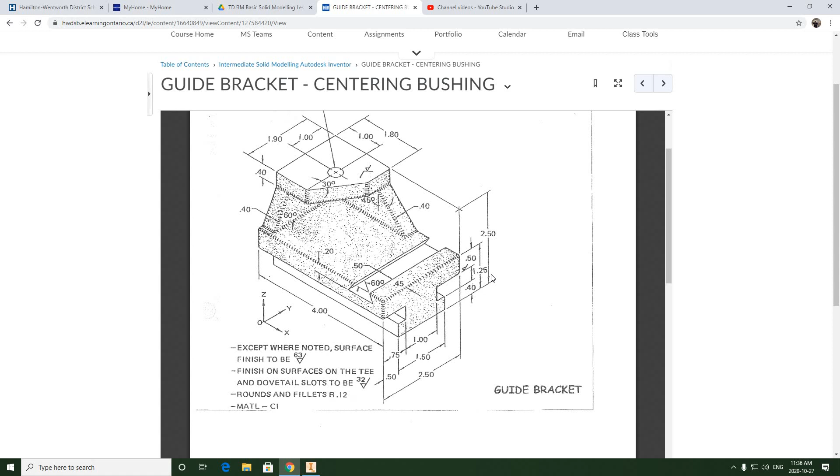Now we're going to be using a C-size sheet to complete this exercise. I'm going to try to keep some of the dimensioning where it is, but some of it has to be changed because it doesn't follow the rules of dimensioning. For example, dimensions shouldn't be sitting on top of the part in orthographic projection. This is an isometric view of this part, so we are going to be improving on it as you've seen me do in the past. I'm not going to be crossing over extension lines.

And I'm going to be setting an appropriate distance from the drawing view when I run these dimensions as well. So, as always, I like to show what this looks like first before I get started, discuss my plan of action, and then I'm going to be switching this to my iPad while I complete the work so I don't have to constantly go between two screens.

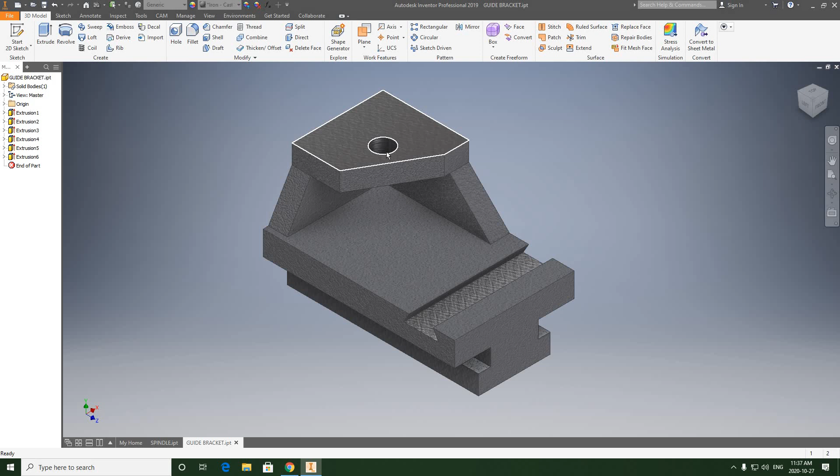So we're going to be going into the guide bracket model, and I also want to remind you not to complete fillets for this. I don't care about adding the fillets to this model, and it actually makes the dimensioning a little harder because there are so many fillets on this that a lot of lines actually disappear when we create the drawing file. So remember, if you've run the fillets or some of them, you can just remove them, because I don't have any for mine, as you can see.

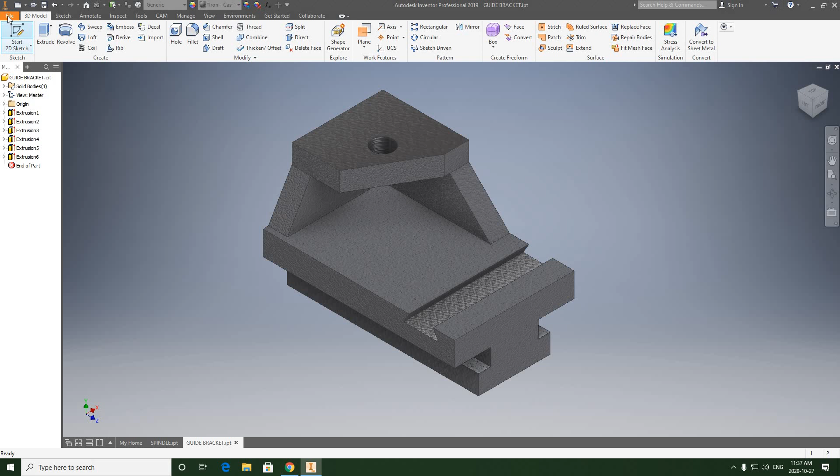So we're going to go File, New, Standard Inch IPT, ANSI Inch IDW as always. And I'm going to change the D size sheet to a C size sheet. We're going to hit OK.

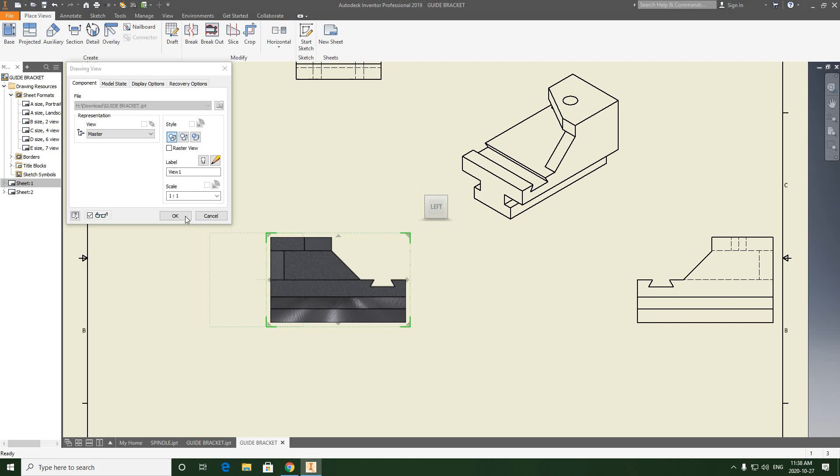And this is going to give us a lot of views that we really don't need and aren't useful. This right side view is useful, but it's considering this to be a front view, and so we're going to be changing this. I'm going to click on this view and switch it to be the left, which is really the front view. This is the view that I'm interested in. And that will force all these other views to get in line with the parent view. The parent view, the bottom left view, the front view, is the one that controls the other views.

As you know, I can move the top view up and down, but not left to right. I can move the right side view left to right, but not up and down. But the front view, I can control them all.

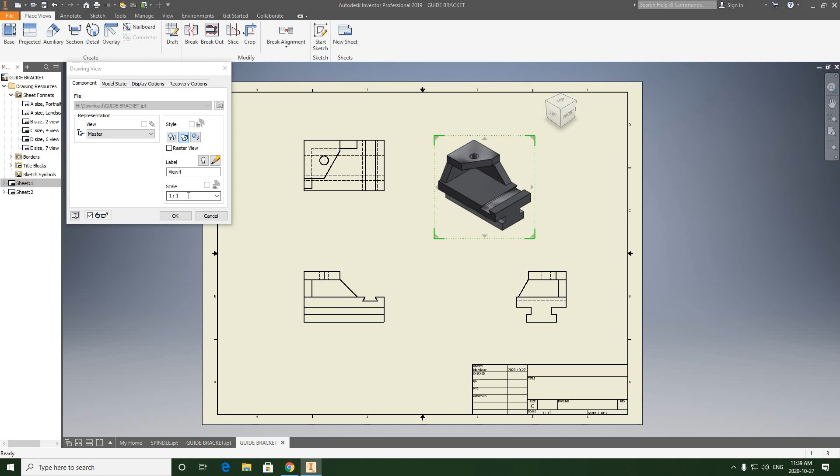And then this view here, we're going to switch this. We're going to double click, switch this corner. This is the better isometric view, shows more information. And we're going to scale this down to 3/4. Hit OK. And we're going to sneak that up into the corner. Well, we're not sneaking it up there, but you catch my drift.

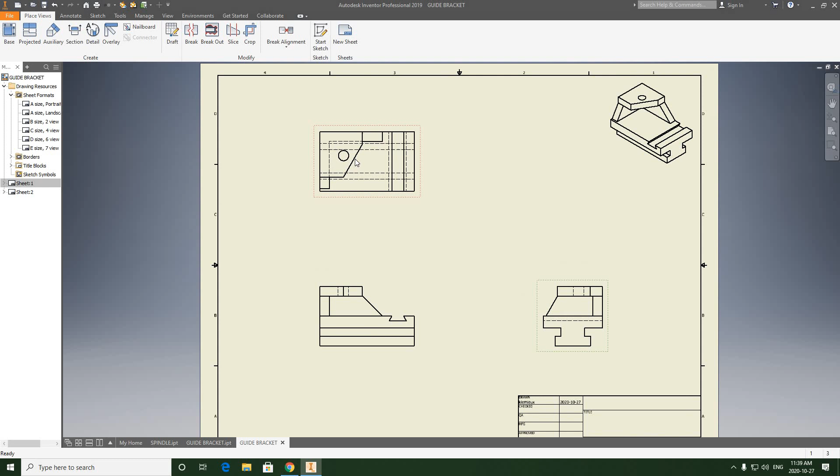All right, so the first thing we need to do, as discussed before, is we're going to be creating centerline annotations. So on a drawing, anything that is circular, a circle, anything that represents symmetry requires a center line. So we're going to switch to annotate, pick center mark, and create a center mark for that circle there.

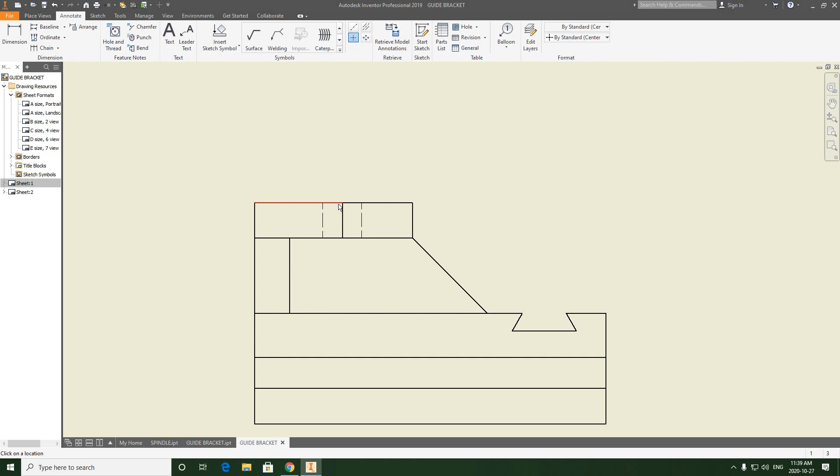Now, here is a bit difficult because this object line is where this object line ends. This is directly in line with the center line. So basically this object line is more dominant and supersedes that center line.

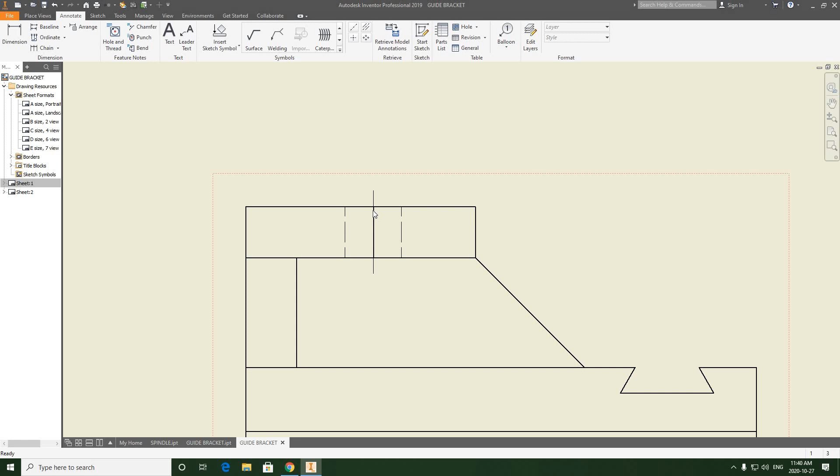But what we can do is still add a bisector center line. We can select this hidden line and this one, and it will add the center line in, because center lines always extend beyond the feature they're attached to. So it makes sense that the center line would stick out above and below the hole. It doesn't really matter that we can't see the center line behind this object line.

And also, we need to show one here. So we'll do another bisector center line. We'll select this vertical hidden line and this vertical hidden line, and we'll create it.

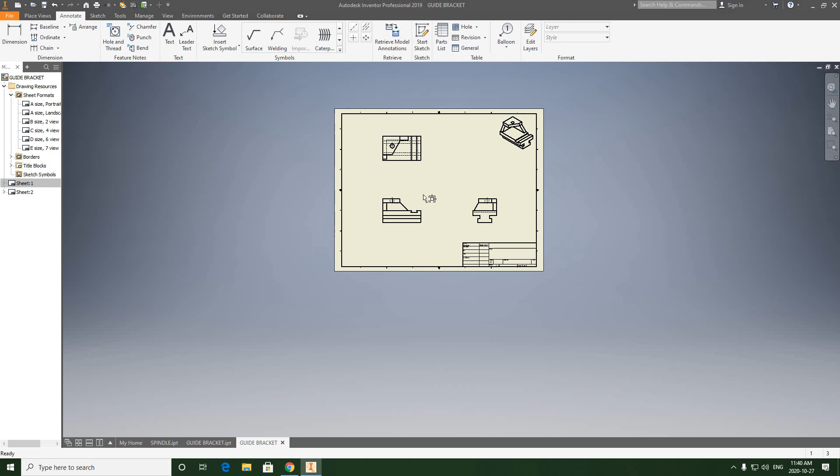So that's everything we need to do for annotations. At this point, we should be able to begin dimensioning this part.

Some of the dimensions I like. The dimensions on the isometric view that show the position of the hole in this top extrusion look good to me, so I'm going to run those dimensions first.

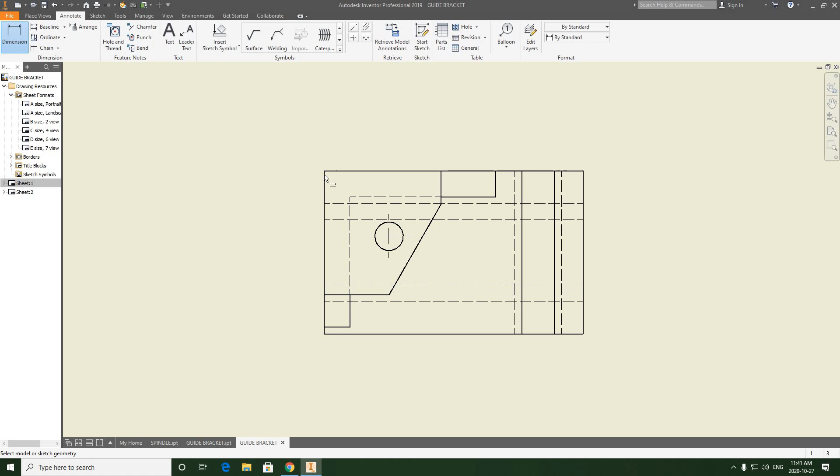It makes the most sense to run those dimensions on the top view where we can actually see the circle in clear view. Remember, we're not crowding the part, we're leaving ourselves some room here, so we're not going to have it super close.

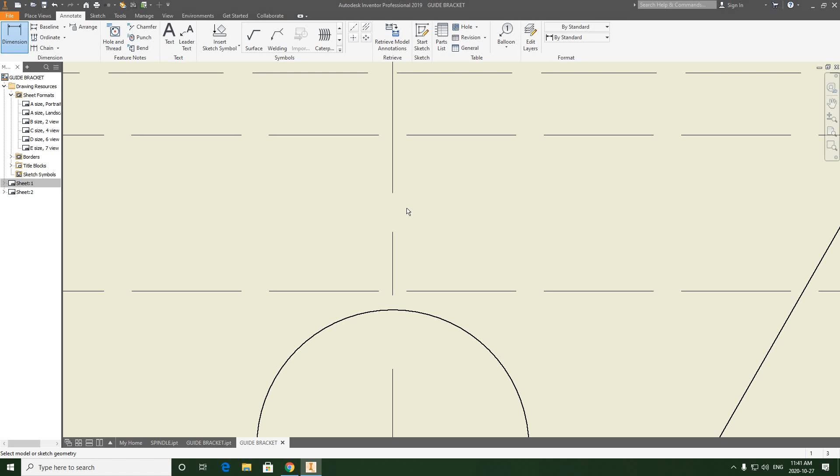I'm using Inventor's hint system where the dimension turns dotted to give me a hint on where I should drop the dimension. Also a reminder that dimension extension lines leave an automatic gap here. When you add the dimension, you click this line and the edge of the center line, it will create the gap for you.

Extension lines should not be running through the holes. This is something I haven't really seen the class do, but just a few people have done things like that, so I just want to clear that up.

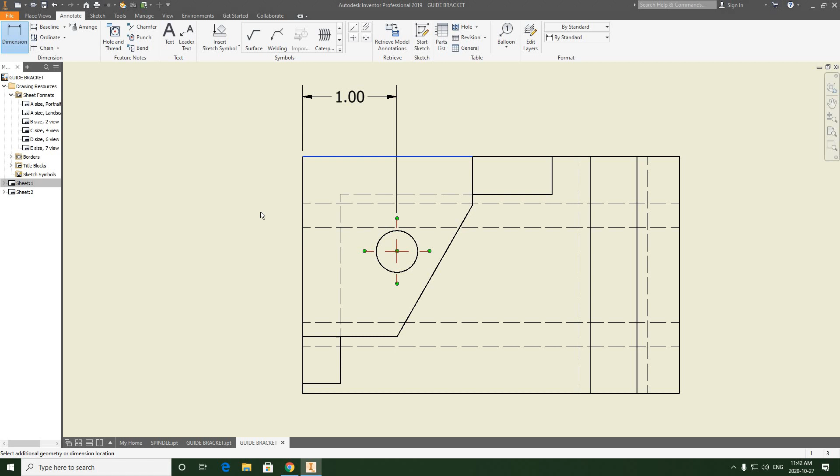So moving on from here to this horizontal line to the center line, we're leaving these 1-inch dimensions pretty even. We want to keep our spacing consistent. This is very important.

These holes, this hole here, we can also dimension this like this.

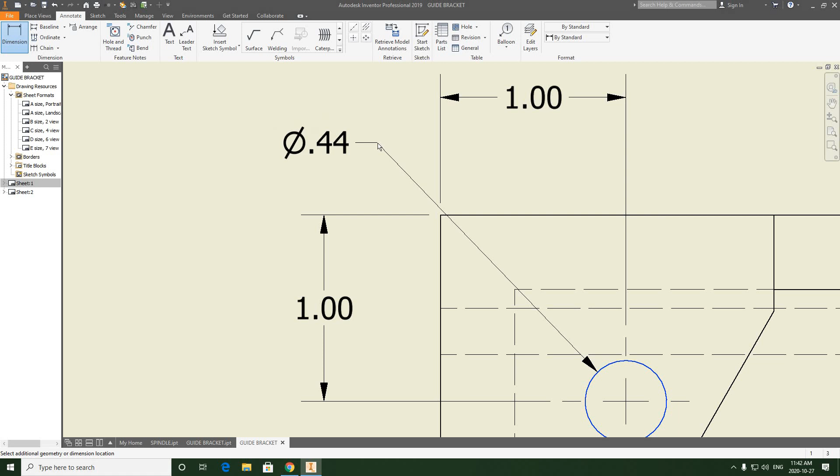We could run the dimension here, sticking into this corner, or we could even run it on this side. It doesn't really matter, as long as we're not crowding it.

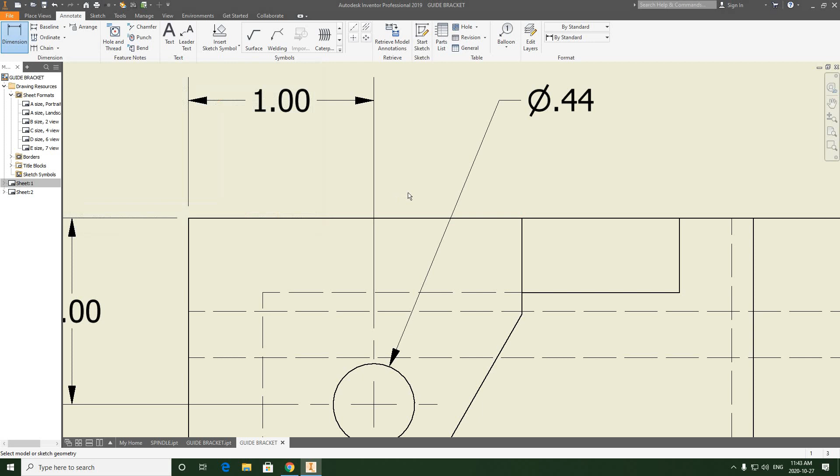So if I put it on this side, I can kind of keep it in line with that dimension arrow, and I don't have to worry about crowding anything and not crossing over extension lines. So I'll leave that one there for now—the 0.44 hole.

Just as a reminder, when we're running these dimensions, we're trying to select the view that is best suited to show the dimensions with clarity. So obviously the top view is the only view where we can show these dimensions 1 inch and 1 inch.

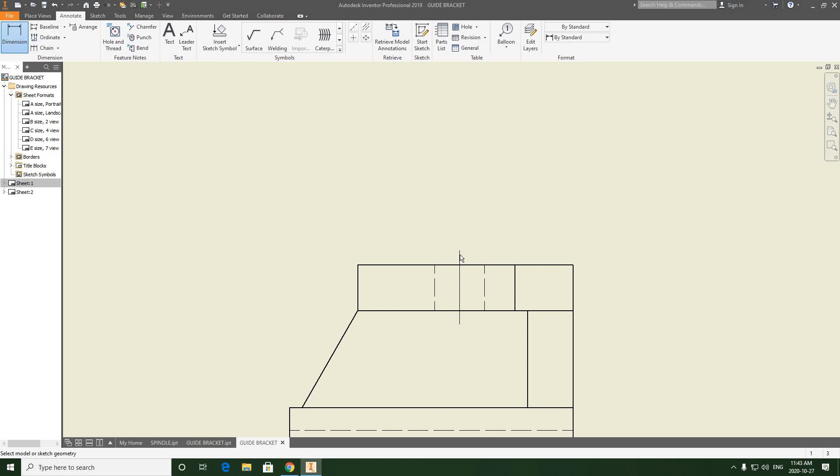That's because we only can dimension to object lines. We can't dimension to hidden detail lines or center lines that are associated with hidden detail lines. That would be incorrect—that goes back to the basic dimensioning rules sheet that's in the hub.

So I may not be referring to that sheet as I do this to show it to you, but I'm verbally referencing a lot of the points that are listed there. So moving on,

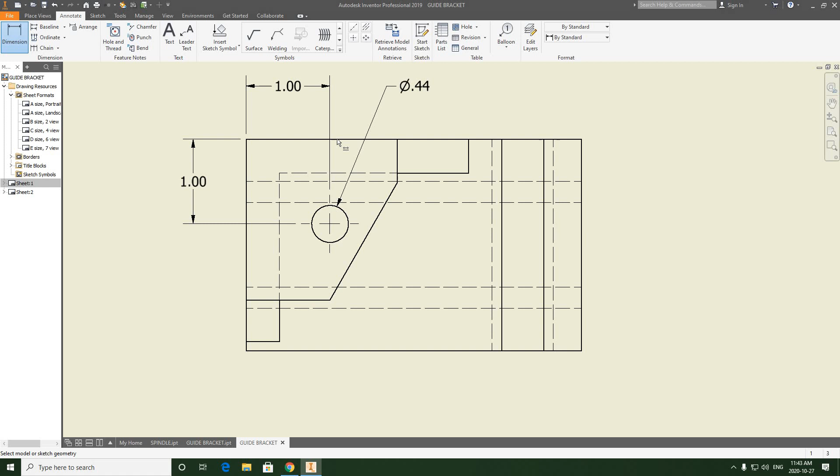I'm going to work on this dovetail slot next. I'm going to clean up what I see on the isometric sheet. I can't have dimensions sitting on top of this.

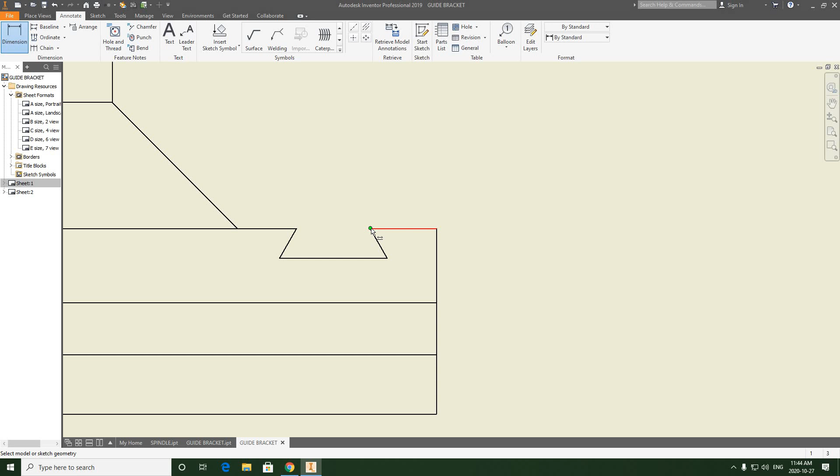What I do need to know is, again, from the edge here to where this dovetail begins. So I can select this line here, pull it up, and this is going to be 0.45.

So what I can do is I can flip this to this side. It doesn't want to fit in the middle, but again, I'm trying to keep the spacing that I pick similar. It doesn't have to be perfect, but it should be pretty close.

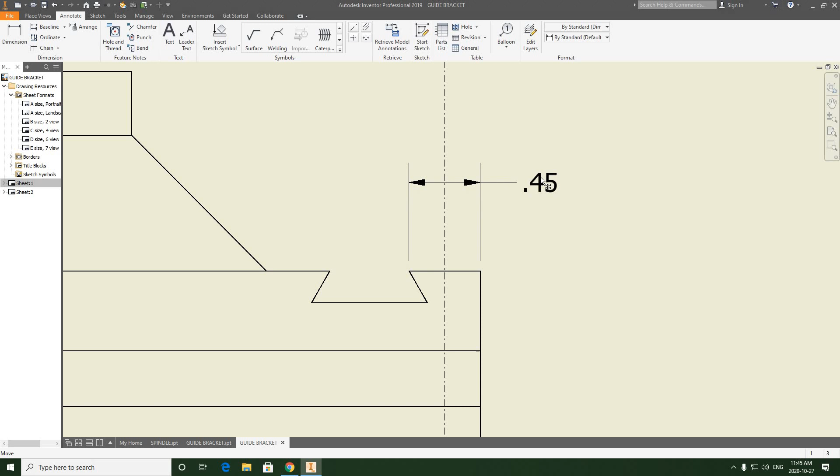This dimension shouldn't be sitting all the way down here if I have these two spaced this far away. For professionalism, we have to make sure that this is being done pretty much the same everywhere. We like to leave ourselves a little room off the first dimension.

We don't need to pull this all the way up here to clear this feature. That would look funny. We only need to come off enough off this detail right here. So next we have the

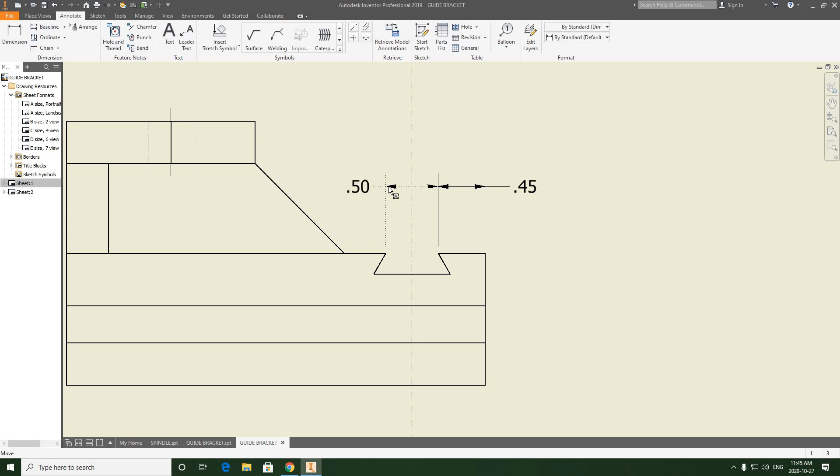0.5—that can chain right up to the 0.45. And again, that doesn't fit inside, so we have to leave it to the outside like this.

We also need to show the depth, which is from here to here, and again we're trying to maintain a proper distance. We can right click, left click OK, and actually drag this dimension to here just so it doesn't crowd up with the 0.45.

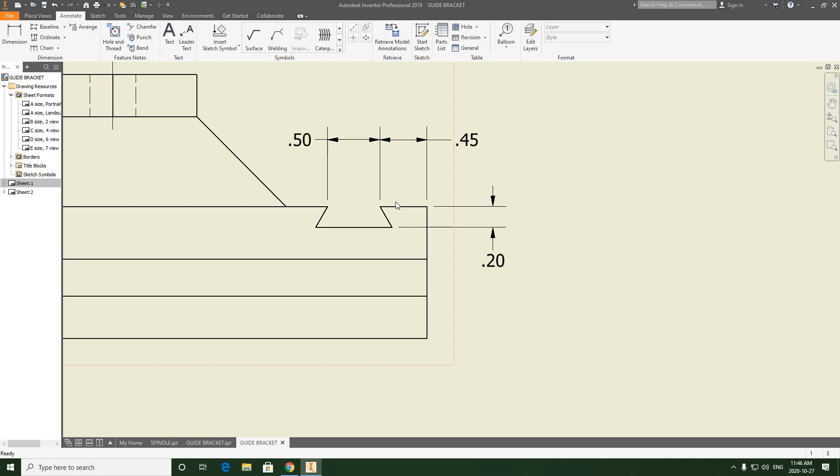So we know the position of the dovetail, its depth here, and what we also need to know is the angle of it.

So we can run a dimension from here to here. Actually, I'm going to undo that because that didn't work out. I'm going to try this.

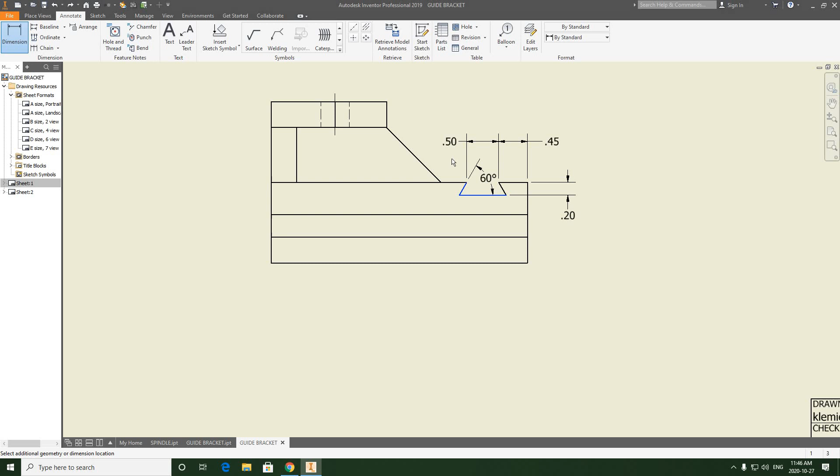And this here, this angular dimension, it's a bit crowded here, right? There's no good opportunity to pull it off the part. So what we could do is what's called a detail view.

So if we go to place views and we select detail, we come in here and we can just pick, select in this area, this dovetail, then left click. We're going to create detail A.

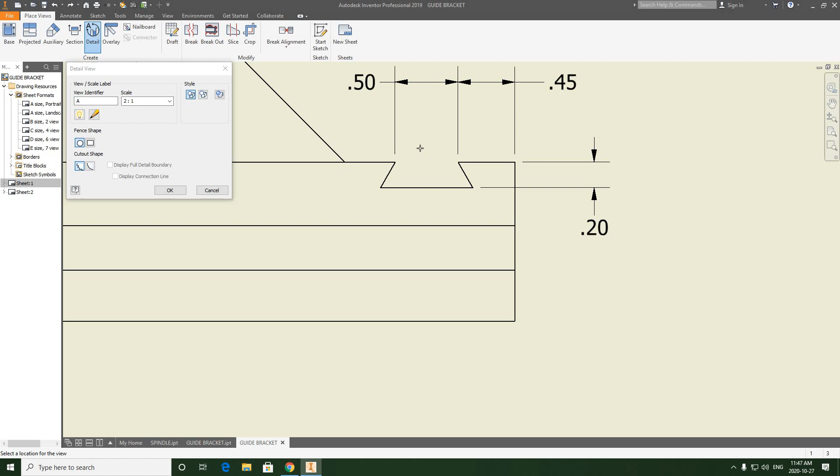And then what we're going to do is pull it off, maybe somewhere down here. And there is our detail A. So this takes this section, copies it, and scales it up twice the scale.

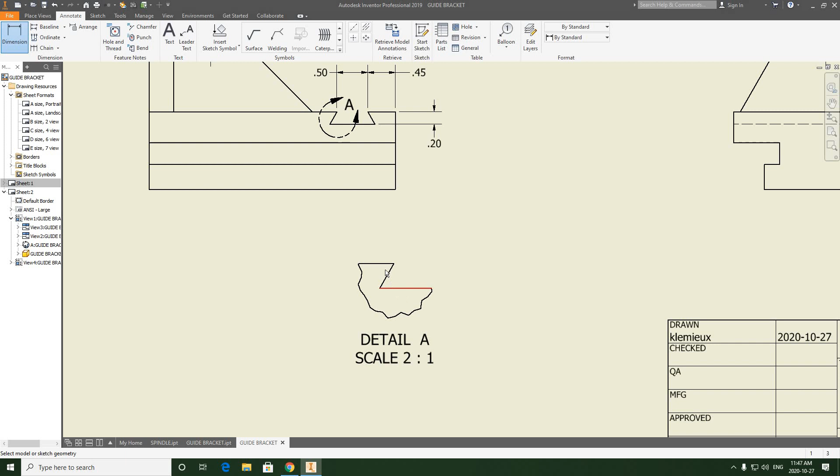And what we can do here is go to Annotate tab, grab Dimension, and then click from here to here, and we can dimension that 60 degrees comfortably. Right? So that's something new that you haven't seen. And that's something that we can take advantage of, definitely, right? There's all these fancy things in Inventor that can make our life easier, and that's one of them.

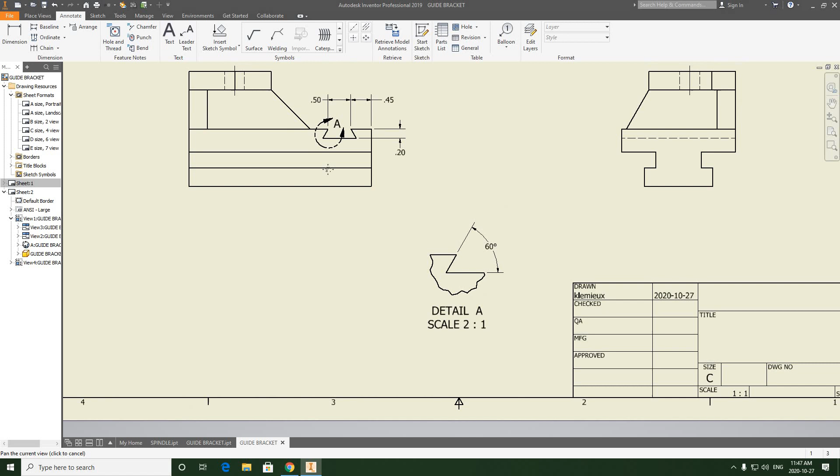So, perfect. Okay, so that takes care of identifying that angle. We are also going to take a look at the thickness of some of these extrusions as well. And I think we'll look at that in a bit.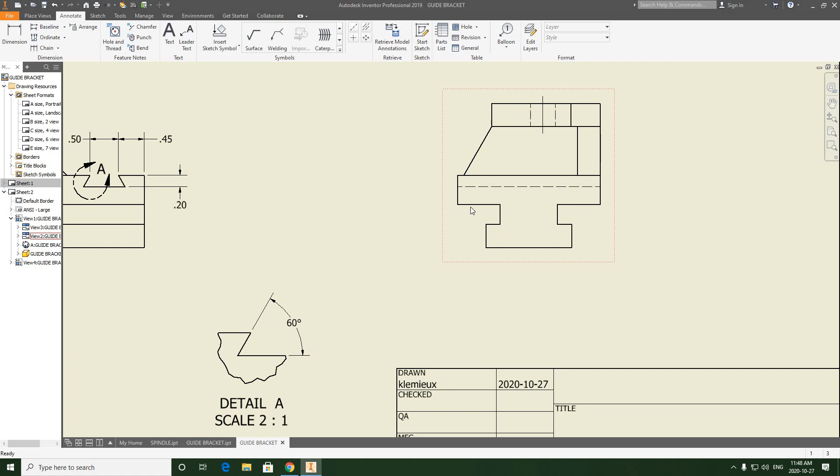I think we'll work on the bottom piece right here. And a lot of the dimensions you see on the sheet, to me, they are acceptable to be placed on this view because this is the best place to dimension all those, because this is a profile, right? This gives you a clear view profile of the bottom of the guide bracket. This is the best place to put these dimensions right here, in my opinion.

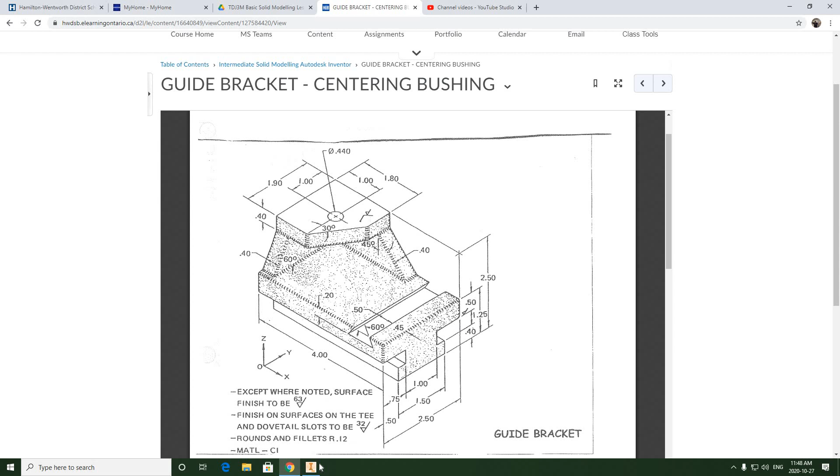Right, and some of these ones as well. So we're going to click over and we're going to run a dimension from here to here, trying to keep our spacing the same, right? And I kind of zoom out to do that every now and again to make sure I'm doing things correctly.

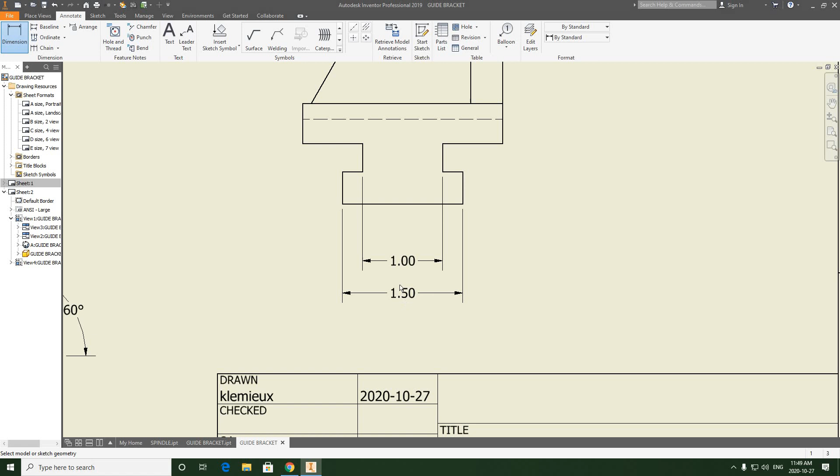And we'll also run this dimension here. Remember these dimensions can be closer, right? The first dimension should always be furthest, and then the second, third, and fourth dimension don't need to be the same. Those dimensions should be a little closer. The reason we leave more space at the beginning is because we don't want to crowd the view, right? So that's the line of thinking here.

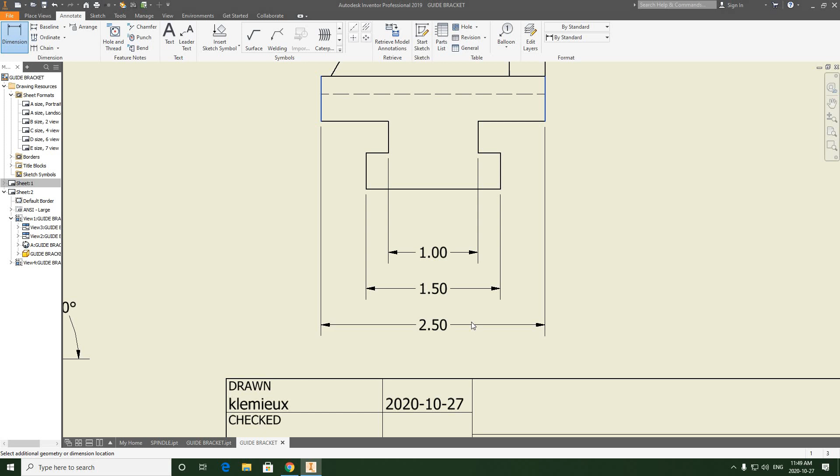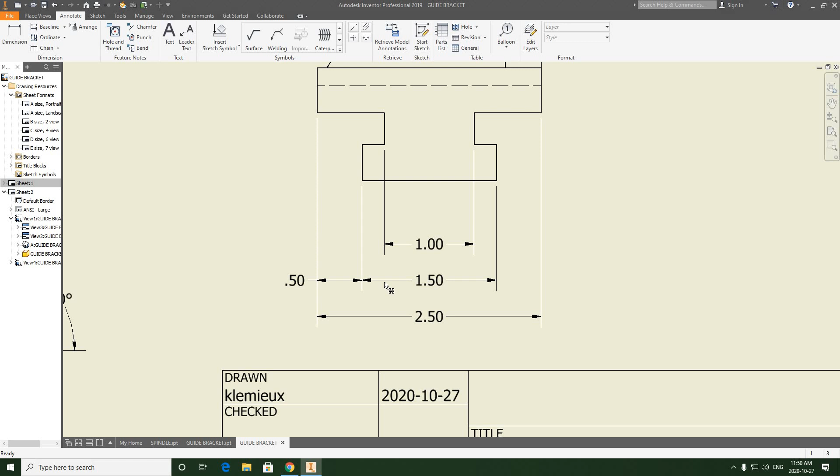And so we've got the 1.5. We also need to show the 2.5 here, which looks fine. And we also are going to be showing that from here to here is 0.5. Hit OK. We also need to bring this to the outside, right? We can't have this 0.5 sitting in this dimension line here. All right, so this is looking good.

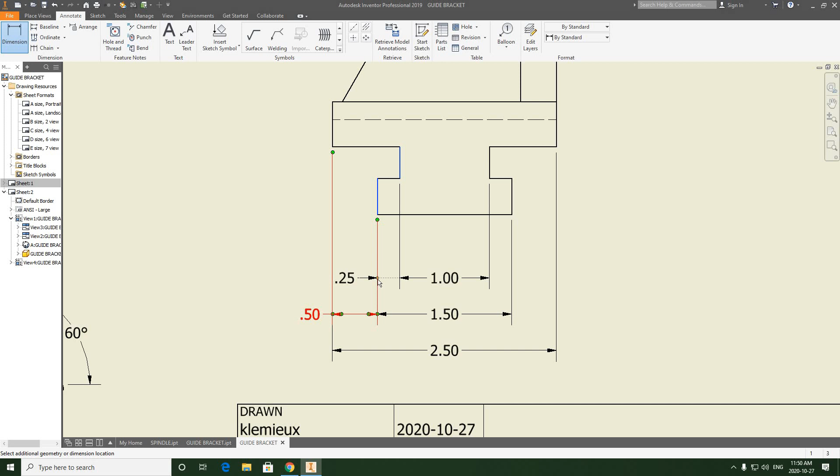What are we missing? We're missing the 0.75, correct? So what we could do is actually run a dimension from here to here and dimension it as a 0.25, right? This is just going to clean this up a bit. And then this is cutting into this extension line. And then we'll just manipulate this 0.25, keeping it in line with the 1.0, and that looks good.

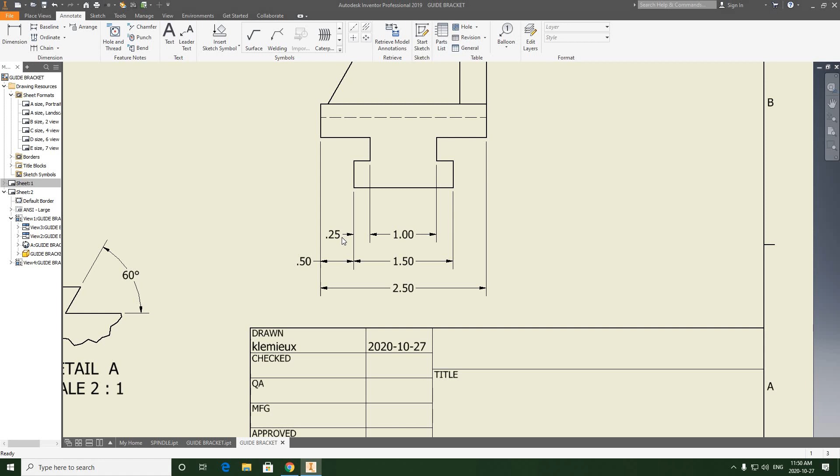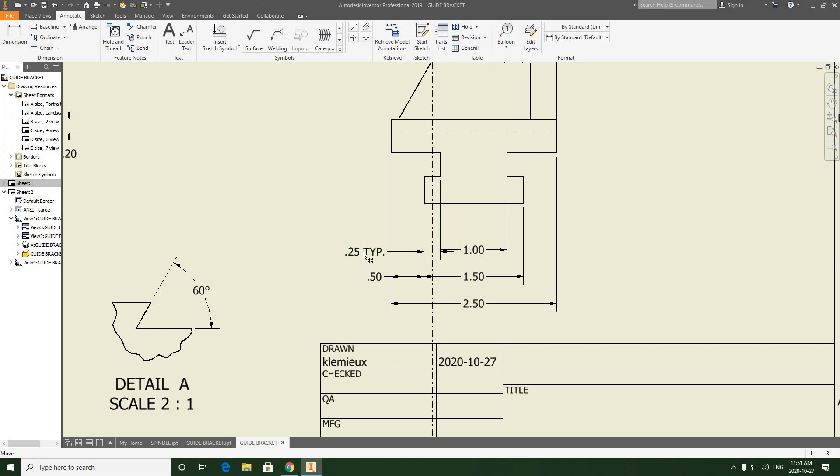And it would also be the same on this side as well, right? So what we could do is add a typical to this. Typical will mean it basically almost tells the story here that it's going to be the same, right? Of course, it also cuts through that extension line, but again, what we could do is actually just create a center line here.

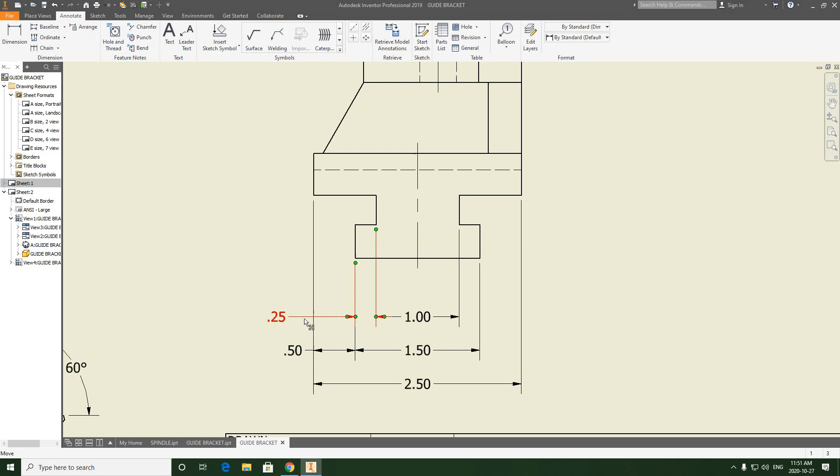Right, so we could eliminate that. We could go to annotate, we could go to center line, find the middle here, and then what we can do is double click this and then get rid of the typical. We don't need to worry about putting the typical on the 0.25 or the 0.5, right? Because the center line will tell the story of symmetry.

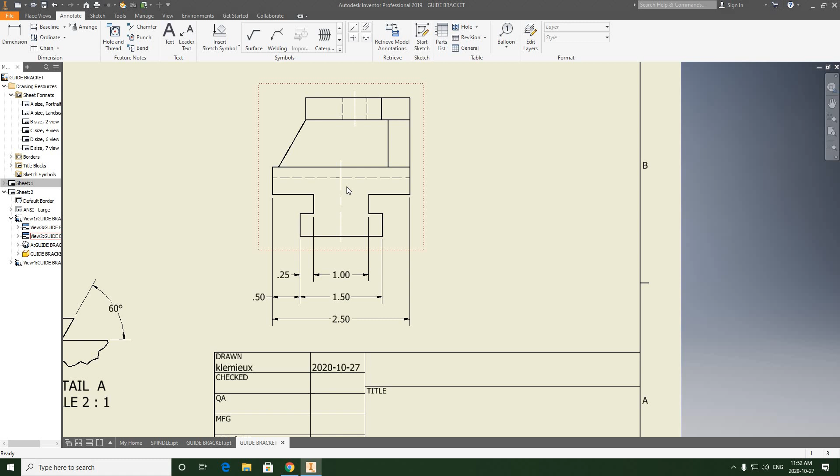That this is symmetrical on this side, so I don't need to add these dimensions to this side or add the typicals, right? So that's the meaning of the center line. Center lines go where there is symmetry, when we want to do some dimensioning for sure. So that should be everything that I need here.

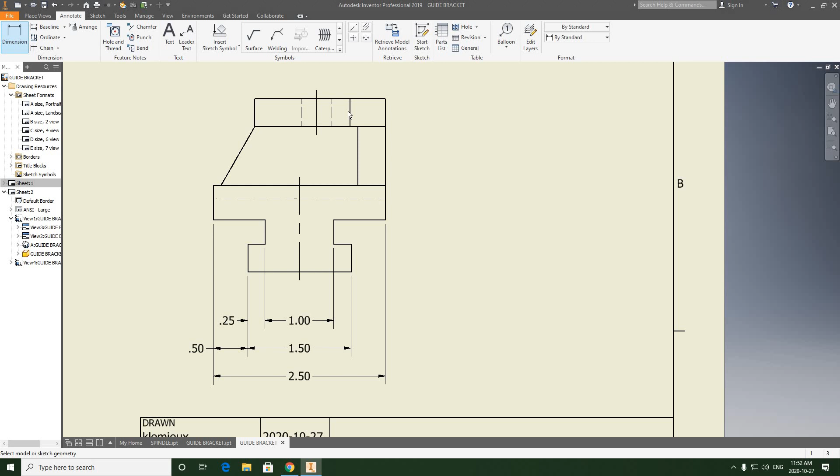We're going to take a look at the right side still, and we're going to be looking at adding some dimensions running vertically. So we have this one here, the 0.5, again keeping that spacing consistent. And we also have a 0.4 here.

Again, we're going to keep that in line with the 0.5. And again, we can't run a dimension from here to here, it's not going to fit. So we'll do as the sheet suggests, and we'll run a dimension from here to here.

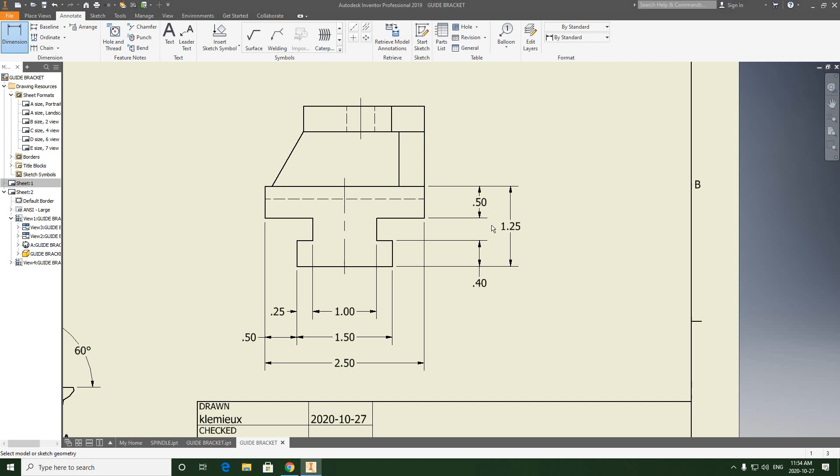And get the 1.25 dimension, again keeping a tighter distance between the first and second dimension. This is acceptable because we know what it is from here to here, 1.25, and if we subtract these two numbers from 1.25, we'll know what the height is. So this is basically like leaving one out of a chain of dimensions, which is acceptable.

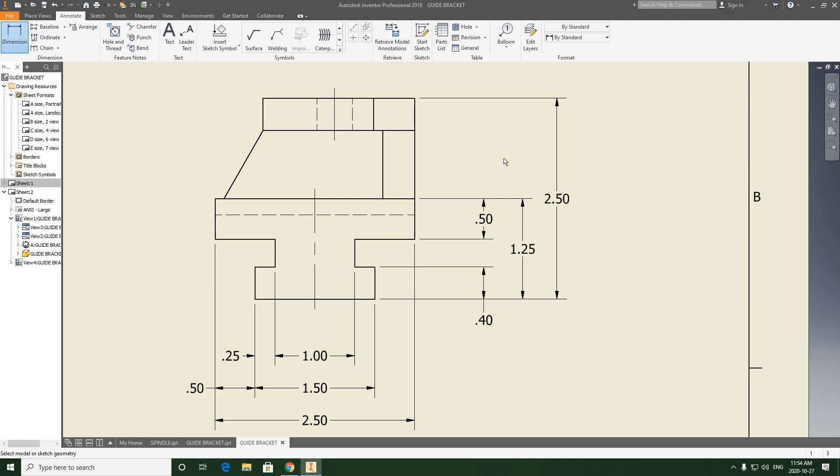And then next we have the overall height, so that is from here to here, maintaining distance. And now we have some options, right?

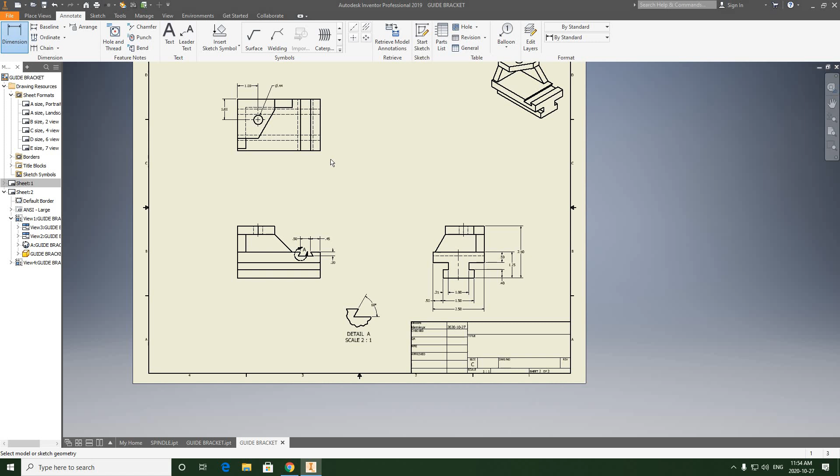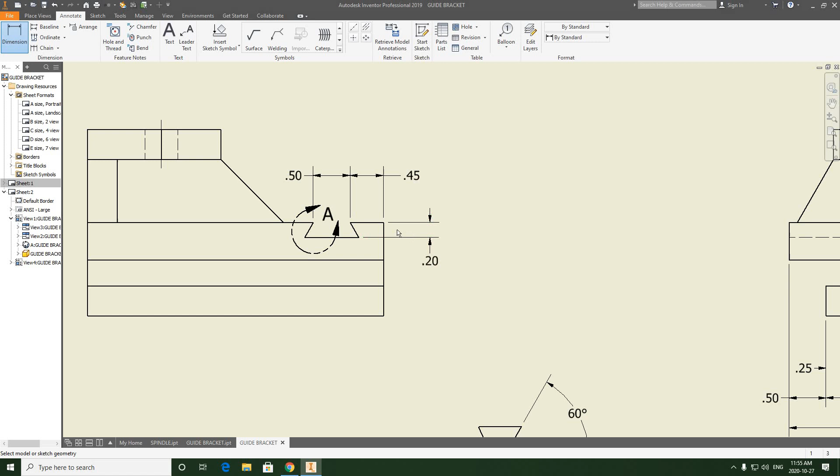So we have to be able to show the thickness of this extrusion and this one as well. Basically we have some options - we could show it on the front view, or the right side view, or the top view. I think what I'm going to do is stick to the front view, because then I can avoid placing dimensions between views. I have to put this dimension between views because I'm not going to run an extension line all the way back to here. It makes more sense to keep the extension lines smaller in length, so I'll just keep it here on the front view, and that's going to be good enough.

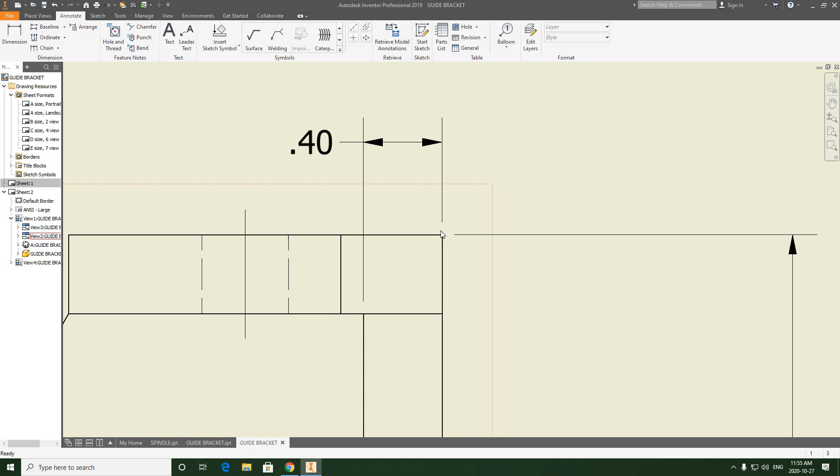So we need to know this thickness, and that is here to here. This is going to be 0.4. Now, you see what's happened here? This extension line is perfect here, it leaves the gap, but it's covering here. So what we're going to do is pull this back up to this end point, just like that, manually snap it to here, and then you're going to get that gap as you should. So there's your 0.4.

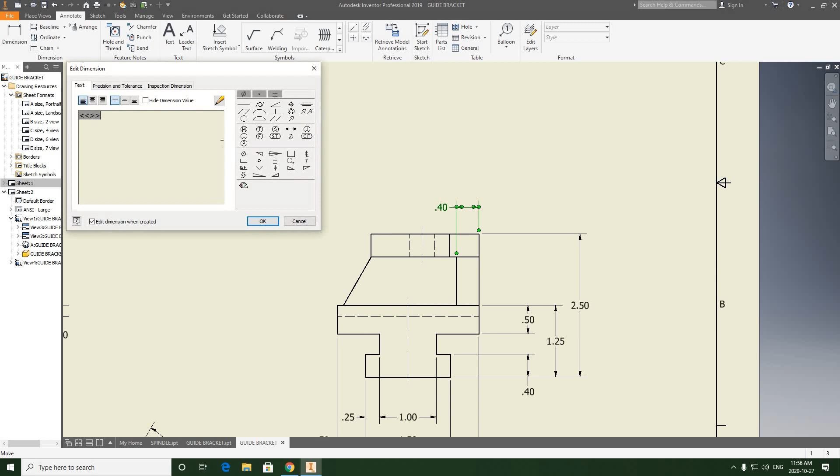And we could also run that dimension for this extrusion right here, but we could just make this a typical, right? Save ourselves some work. Typical, meaning that this is the same, and that should be good enough. We shouldn't need to run that dimension again for the top extrusion, because it's pretty clear that it's the same thickness if you look in other places.

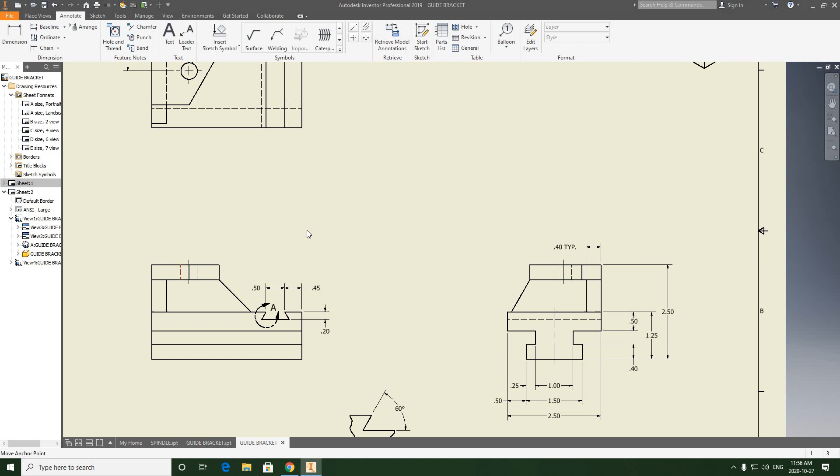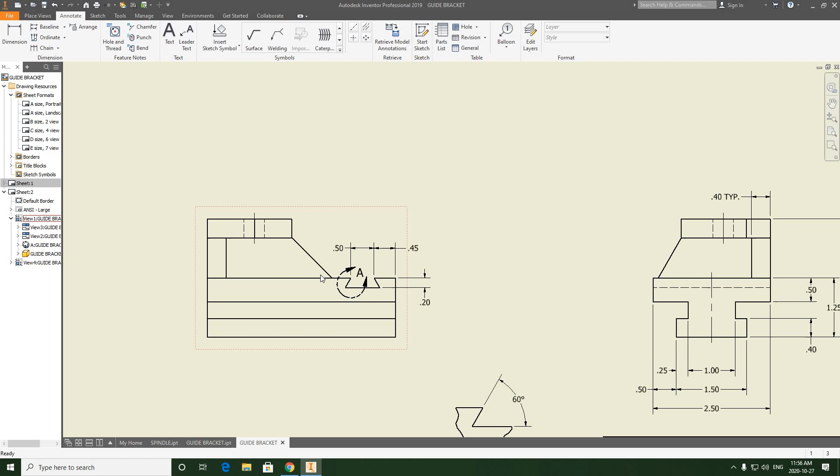All right, now what we also need to do is create some more dimensions. I think I'm going to be actually creating some more detail views as well, so I'm not keeping dimensions on the part. So one thing I can do is create a detail view here - place views, detail - and this will be detail B. And we'll put it down here, and this is going to tell the story of the angle, right?

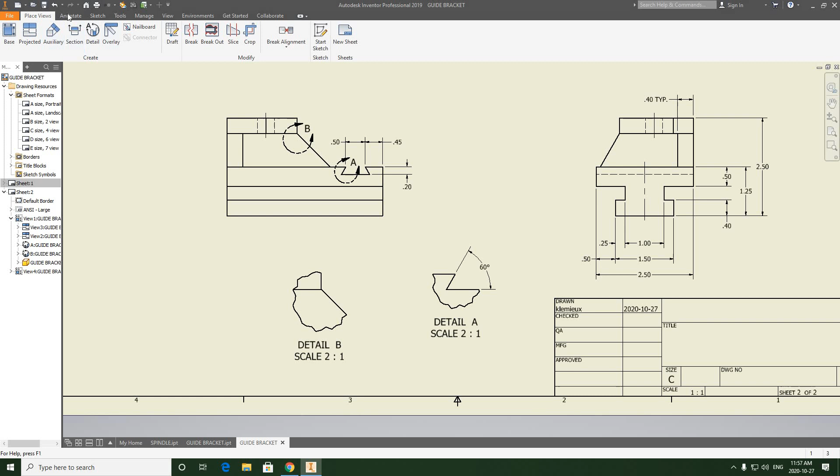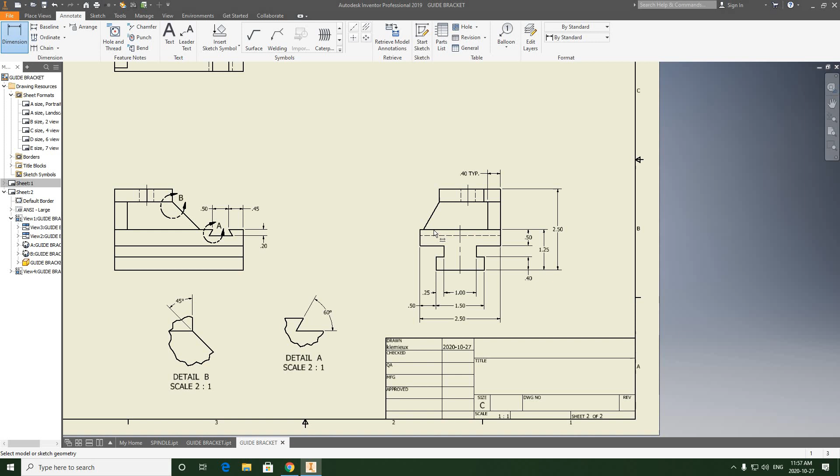So this will be annotate, dimension from here to here, and we can run that 45 degrees here right off that view. Perfect, detail B, and we're also going to do a detail C for this 60-degree angle that needs to be done.

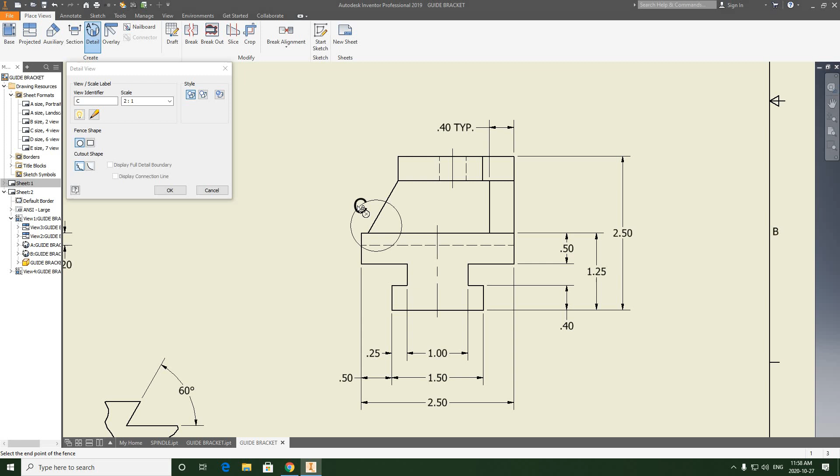So we're going to go to place views again, pick detail, we'll just click somewhere here to get it started. I haven't played around with this menu at all - I'm happy with the 2:1 scale, so I'm just going to click here. And there we go. And then what we can do is go to annotate, and we'll dimension, and there's our 60-degree angle.

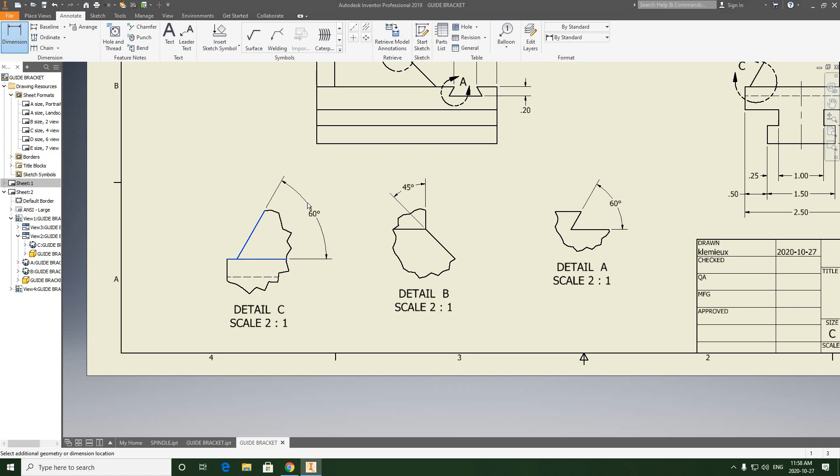And one thing I'll do while I'm down here is just move these in alphabetical order - we might as well keep them A, B, C instead of C, B, A. So that looks better - detail A, detail B, detail C, and their scales. Then we're not keeping these angular dimensions on the part; we're spacing things out a bit.

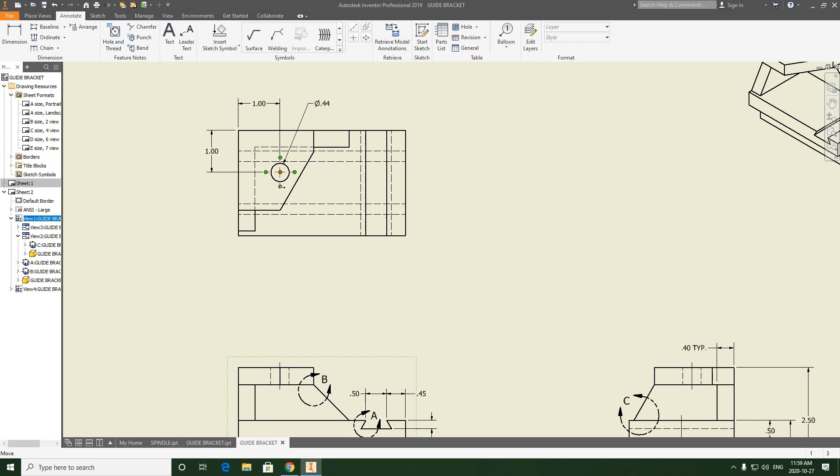Okay, so I'm just scanning this to see what else I have to do. We've got...

The 30-degree angle here, we'll see what we can do with this. Again, we can pull that one off the part, but this is going to have to go between two views since I have no option to get it up on this side. So we can place dimensions between views when it's possible, meaning when we have an advantage to do so. In this case, it makes sense to run this dimension on the inside of the top view, so we'll keep the 30 degrees like this.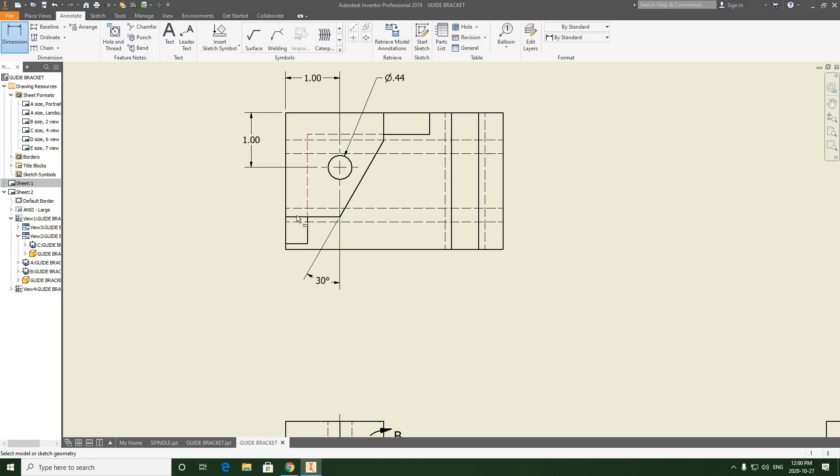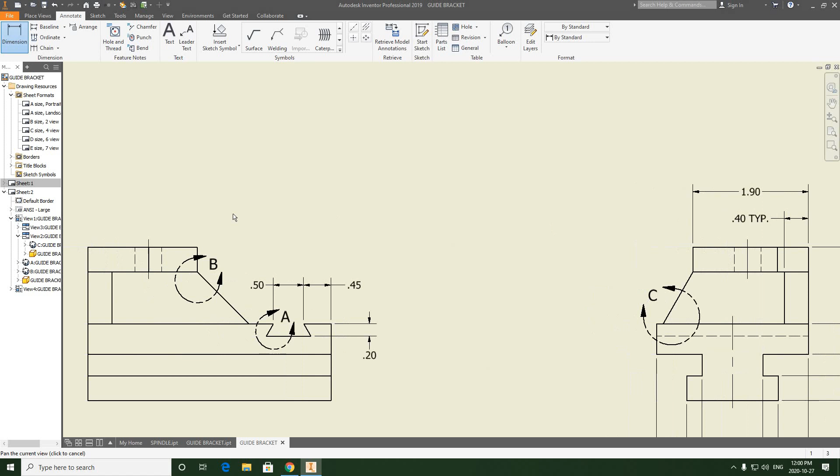We also need to show the length of this top extrusion, vertically and horizontally. The sheet shows those dimensions up here, but I'm going to show them where they're understood the best, which is in the profile. So that's here, and also here. I realize this places a dimension between two views, but they're not crowding, and I think this is better understood.

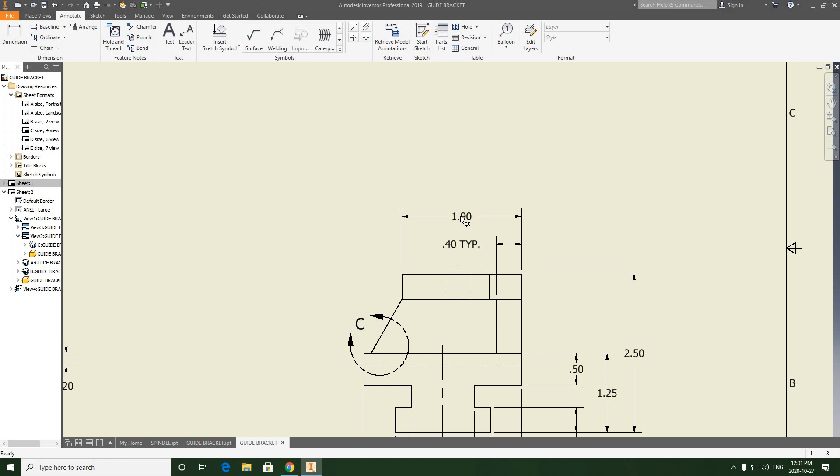And you know what I'm going to do? I almost forgot, I need to move this up. This needs to be... this is too close. I'm not being consistent like I should be. We're trying to keep these dimensions a certain distance.

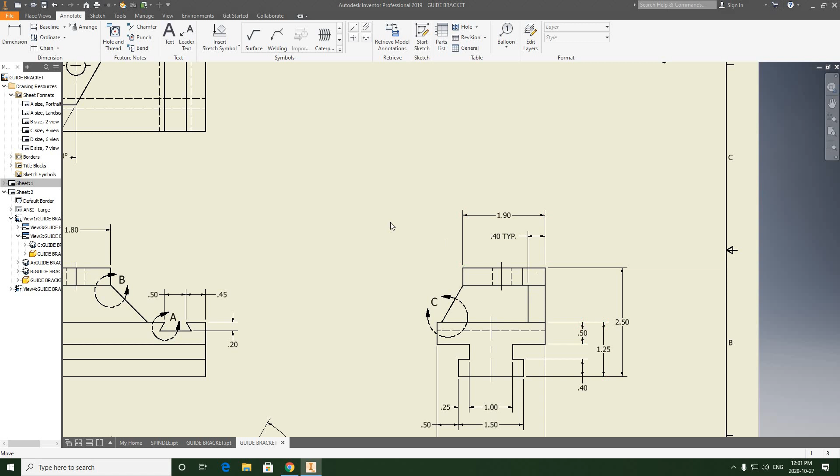So I'm just scanning this to make sure it looks proper. Like I said, I don't expect it to be exactly perfect, but when we look at it, it should look like that kind of care was taken, making sure our spacing is consistent from the first dimension, from the second and third and fourth dimension, from the first as well. Reminding you again that we're keeping these dimensions a little closer.

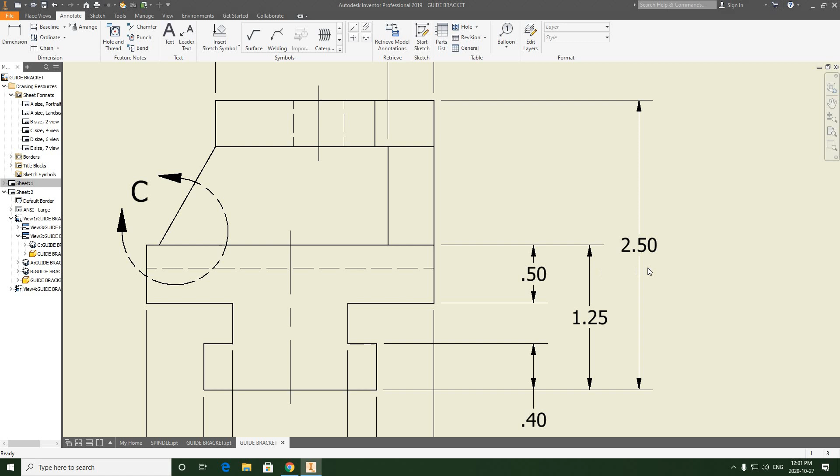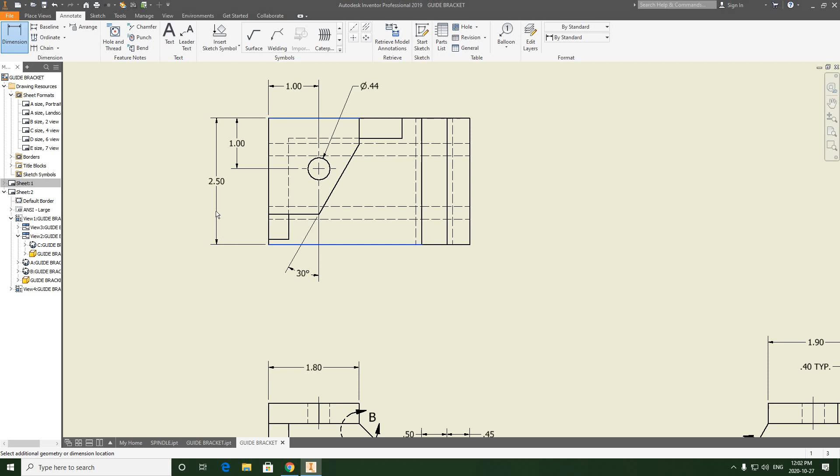And we're also going to need an overall length. We have an overall height, and we also are going to need an overall width. So we'll place that on the top view here, from here to here. That's going to give us 2.5, and we'll put our overall length on the bottom of the front view. We'll keep that in line with this one, keep our spacing consistent. And that should be it when I look at this.

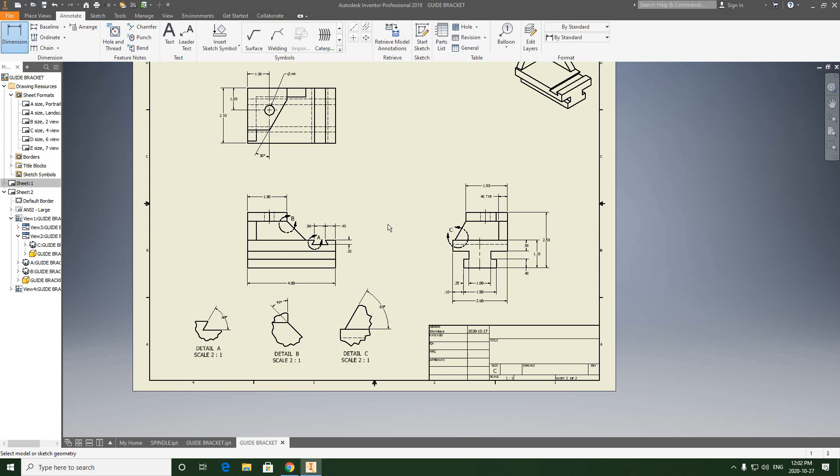So remember, no matter what, even if it's not given, when you're completing an orthographic drawing for dimensioning, you always need to have the height, width, and length, the overalls listed somewhere. So we have the height on the right side view, the width on the top, and the length on the front view. They don't necessarily need to be all spread out over 3 views. You can get 2 of those on one view if you like, but in this case it works out for us that we're able to place them and space them out all over the 3 views.

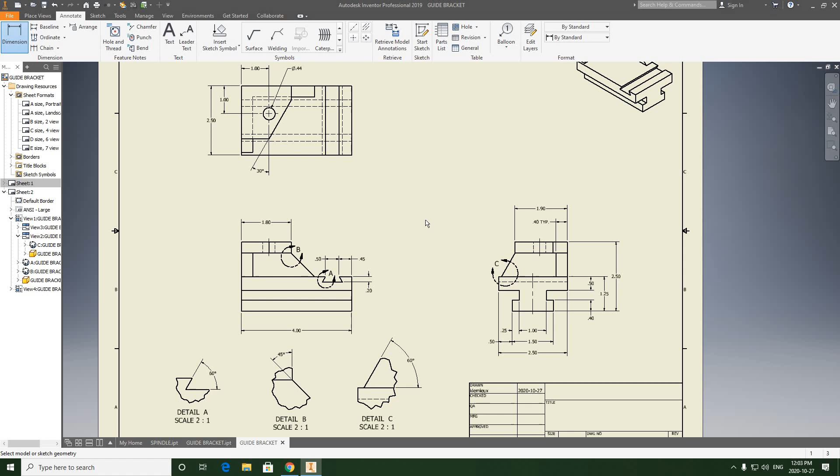Okay, so I'm going to call this part done. That is the detailing for the guide bracket. Good use and practice of what a detail view is and how to execute it. And the only thing I have to do now, like you've seen me do it many times before...

...is the drawing file title block completion, where you enter your name. This is the guide bracket, company, Ancaster High School, revision number 0. Every time we need to make corrections to these things, we rev the number up. But this is the original, so this is going to be 0, the original release. So if you handed this in and there are mistakes, I would show you the mistakes, and then I would also cross out the 0 and write a 1, because you'll change that to a 1 for the next time you submit it.

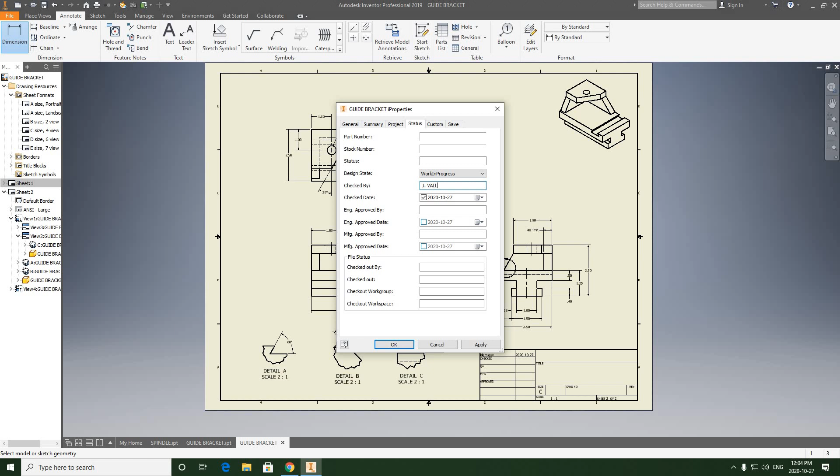So that's a little better explanation of what a revision number is. Our part number should be 3M1 dash, and this is the 6th drawing, because the centering bushing was our 5th, bevel washer was our 4th. Status, checked by — I'm putting my checker's name in — and apply, and hit close.

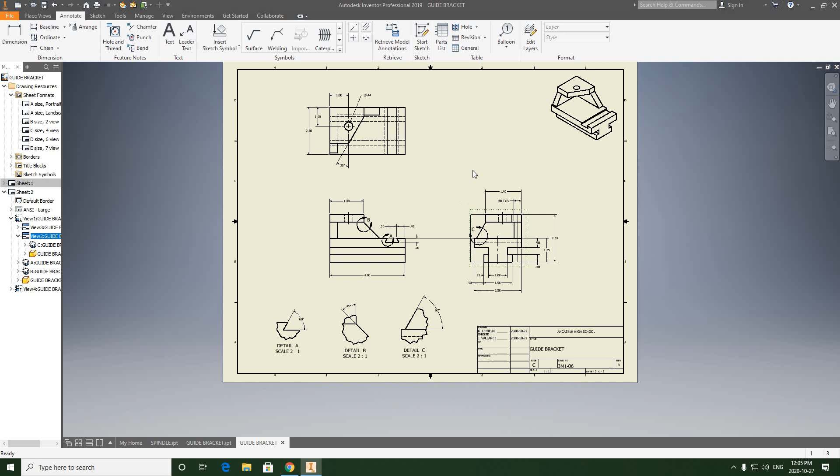Okay, so how does this look? This looks the way it needs to be. We may just fix this so it's consistent in terms of spacing between views, and that should be it.